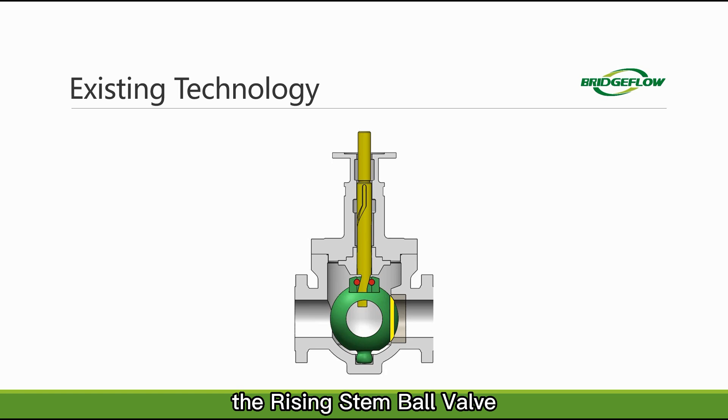Invented in the 1920s, the rising stem ball valve was the only mechanical seal ball valve in the market. One powerful benefit of this valve design is that it can switch on and off completely free of ball and seat friction, and therefore eliminate seal abrasion.

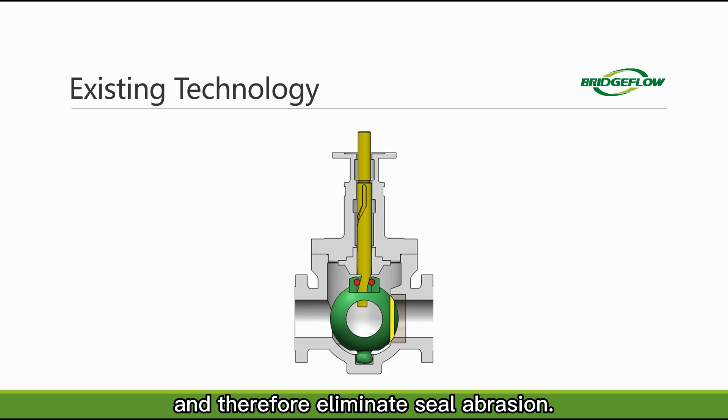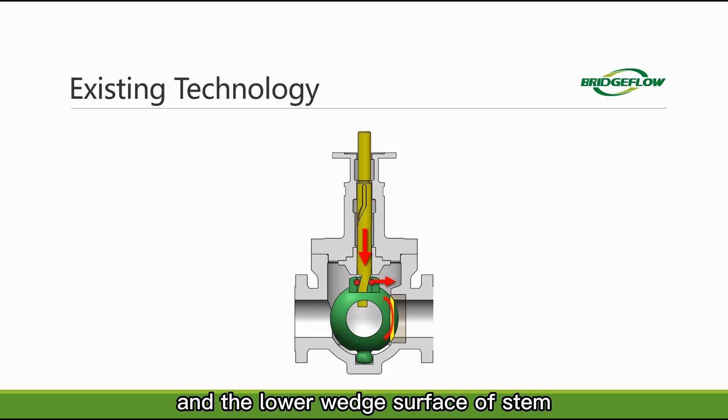The result is that this seal can last much longer than traditional ball valves. While closing, the stem moves down and the lower wedge surface of the stem squeezes the ball to tilt and compress the seat. A single mechanical seal can be achieved.

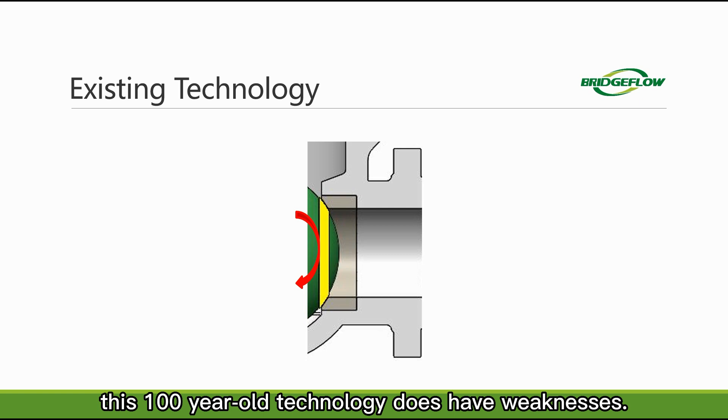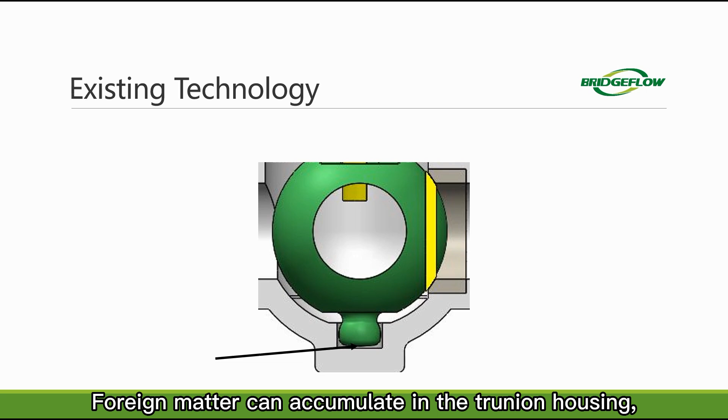However, this 100-year-old technology does have weaknesses. Firstly, it is obvious that the ball-to-seat alignment is very critical for the mechanical seal. Foreign matter can accumulate in the trunnion housing, which changes the ball-to-seat alignment. This misalignment can cause leaking.

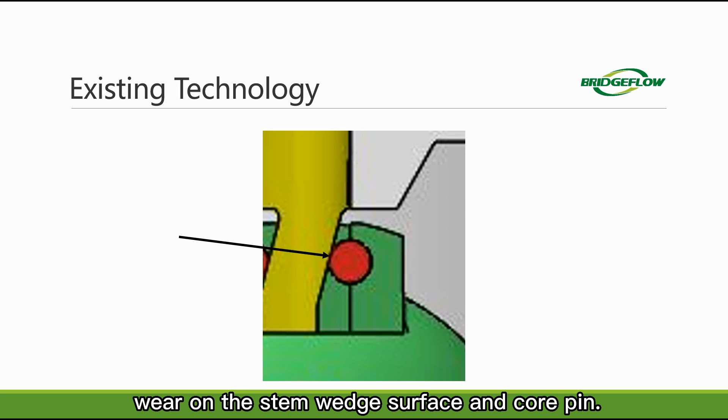Another challenge is material wear on the stem wedge surface and core pin. As the mechanical seal load must be transferred through this very limited contact area, it can easily cause the material to wear and the valve to fail.

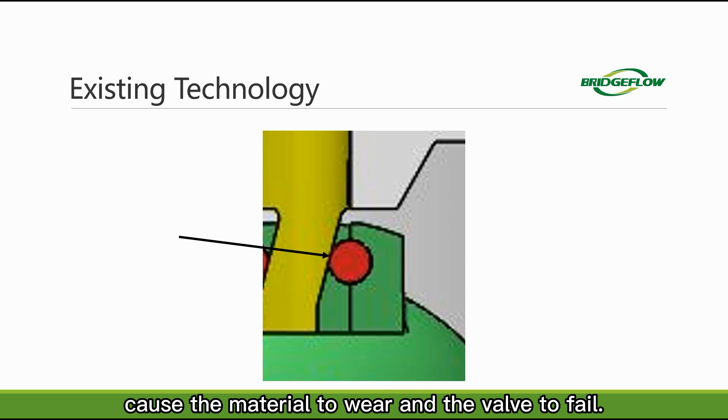And finally, it has only one seat, and therefore only one mechanical seal can be achieved.

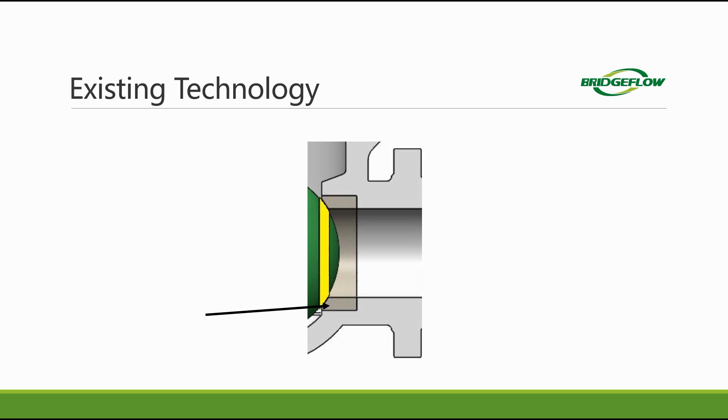In many applications, such as piping that needs isolation for maintenance, switching piping processes, or preventing product contamination, positive isolation is so critical that a DBB and/or DIB is required.

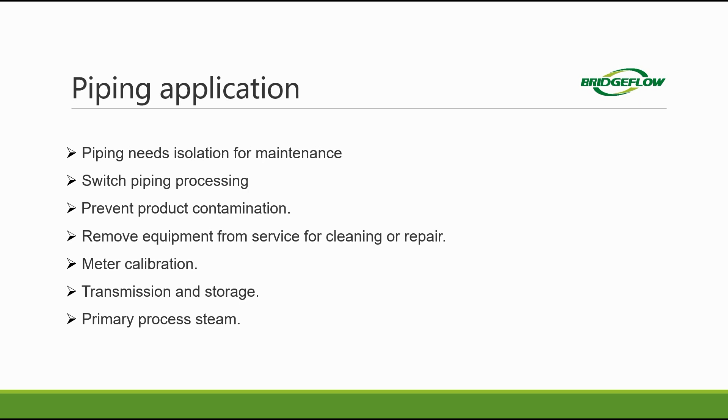According to API 6D, DBB and/or DIB as shown here requires 2 blocks and 1 bleed to stop the pressure from one side or both sides, and create an air gap by bleeding the space between the 2 blocks, so that a higher level of isolation can be accomplished.

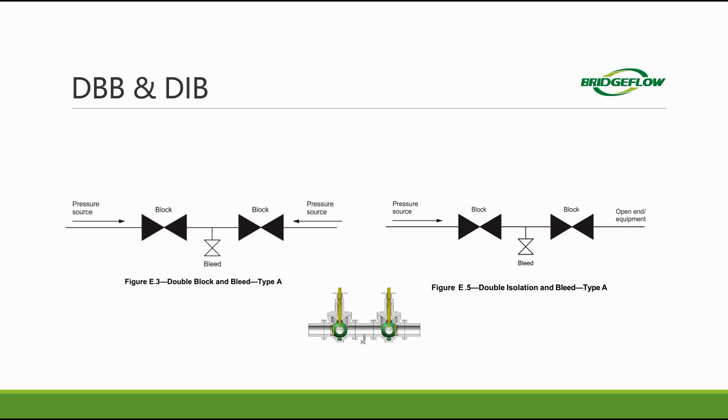This means that 2 rising stem ball valves will be required, as shown here, for the function of DBB and/or DIB. This system is very complicated, bulky, and full of potential leak paths.

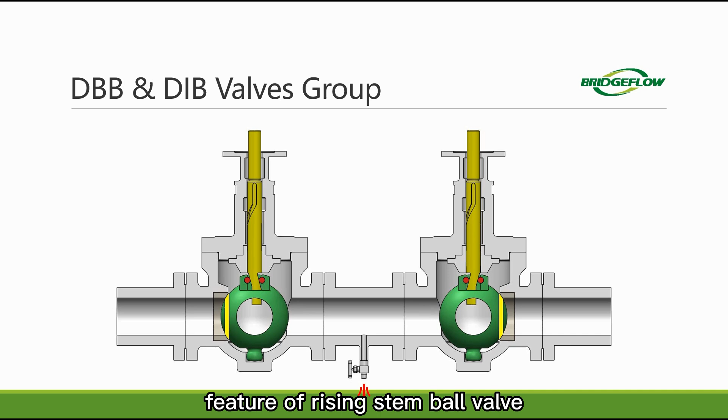Let's optimize this system in depth by maintaining the beautiful feature of the rising stem ball valve and overcoming all its design shortcomings. Obviously, the valve ends, seats, and blind segments on both sides are directly responsible for the mechanical seal.

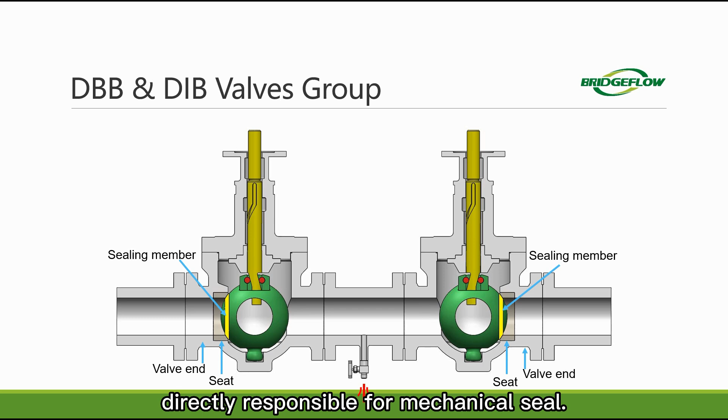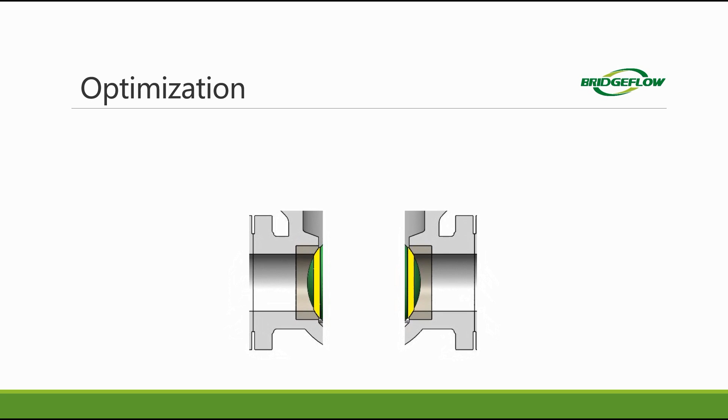Remove the rest, then compress the length of the 2 sections. Slightly modify the blind segments. What we need is a mechanism to provide the proper seal load for the 2 blind segments.

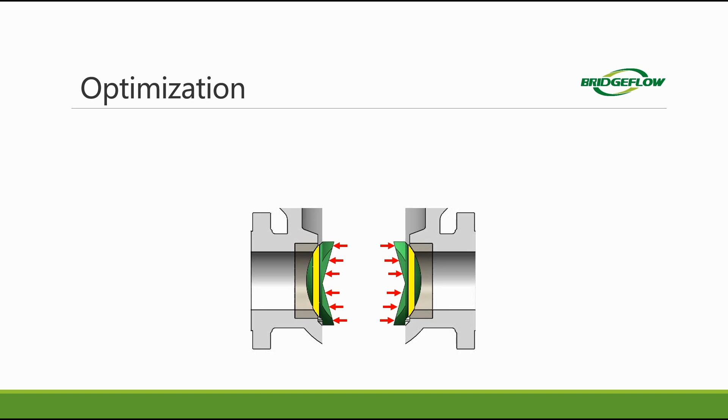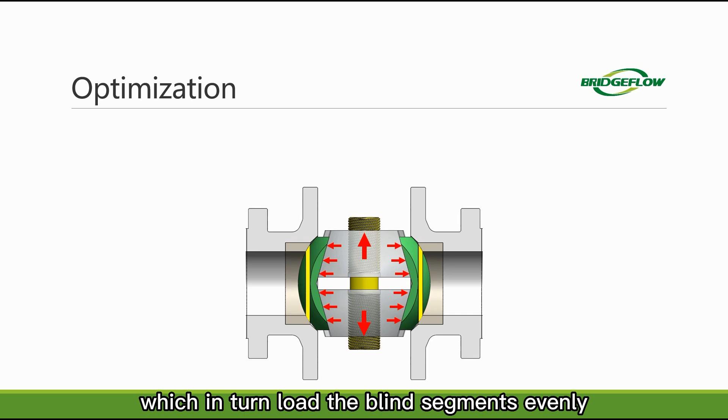This is the mechanism: a rotating threaded shaft mechanically loads equal amounts of force onto the 2 wedge segments, which in turn load the blind segments evenly and under equal and balanced force onto the stationary seat faces. 2 mechanical seals are accomplished.

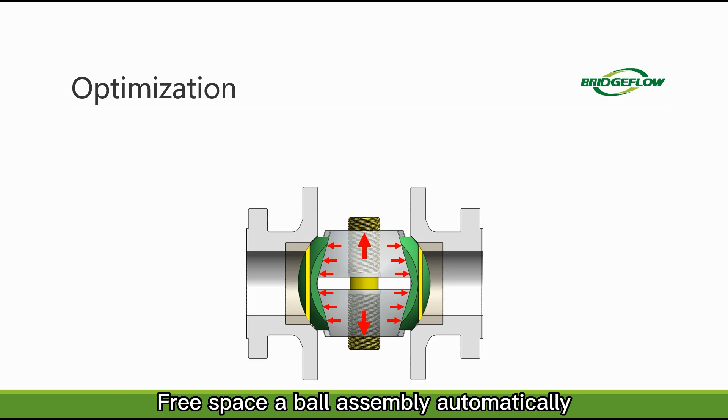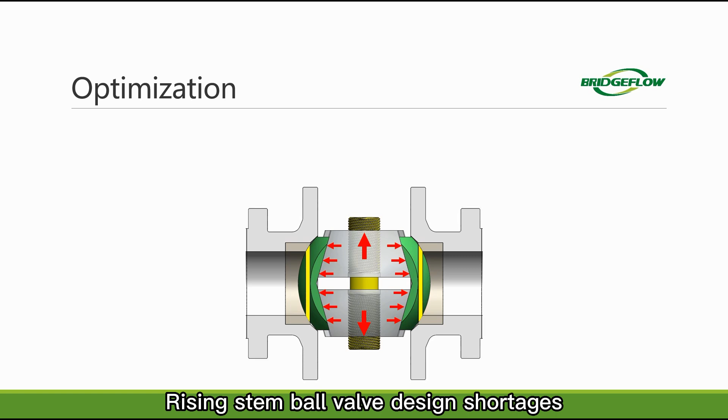Free space of the ball assembly automatically solves the ball-to-seat alignment. The mechanical seal load is beautifully distributed with no stress concentration at all. The rising stem ball valve design shortcomings are perfectly overcome in the new design.

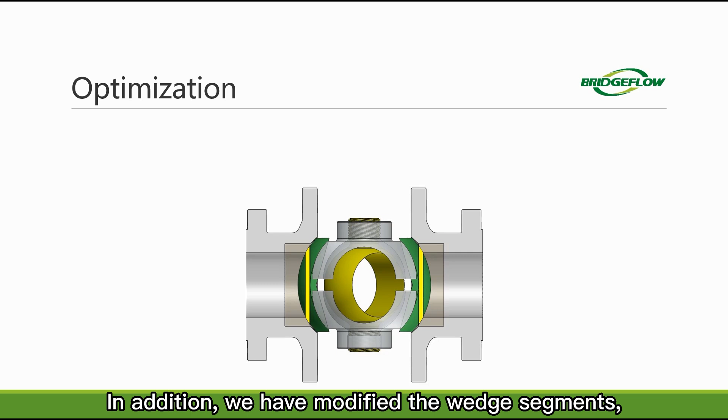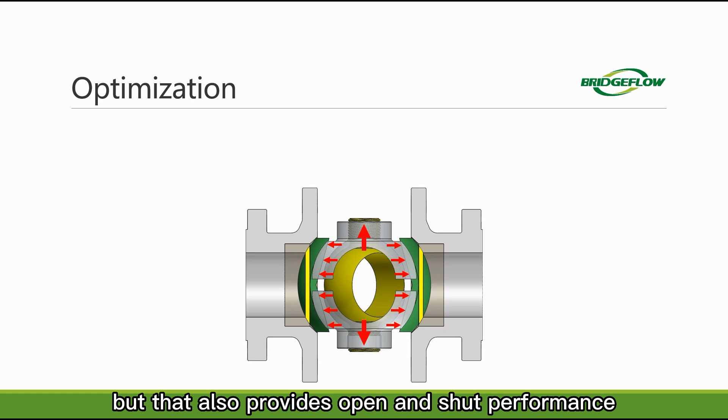In addition, we have modified the wedge segments and the shaft into a rotating ball assembly that maintains the function of providing a mechanical seal evenly to the spherical blind segments, but that also provides open and shut performance for material flow.

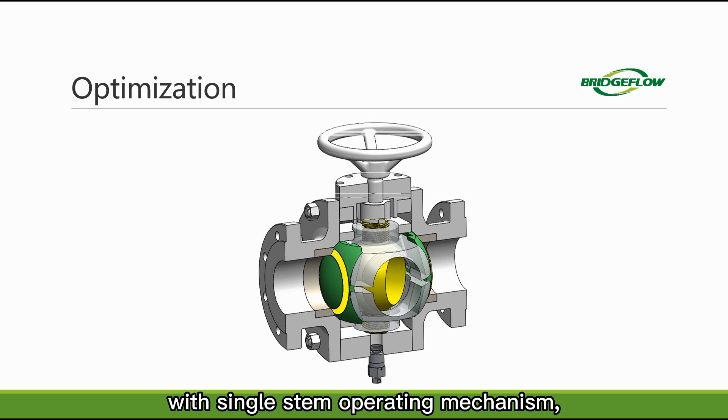Lastly, the subassembly is matched with a center body with a single stem operating mechanism and trunnion mounted. When opening, the ball assembly retracts the segments, then rotates until it is fully open, allowing for friction-free movement between ball and seats. It is full port in the open position.

When closing, the ball assembly first rotates to the closed position with ball and seats friction-free, then the stem drives the ball segments to expand. The blind segments press the seats under mechanical load to achieve a balanced mechanical seal.

Bleed the cavity, and positive isolation with DBB and DIB is functioned.

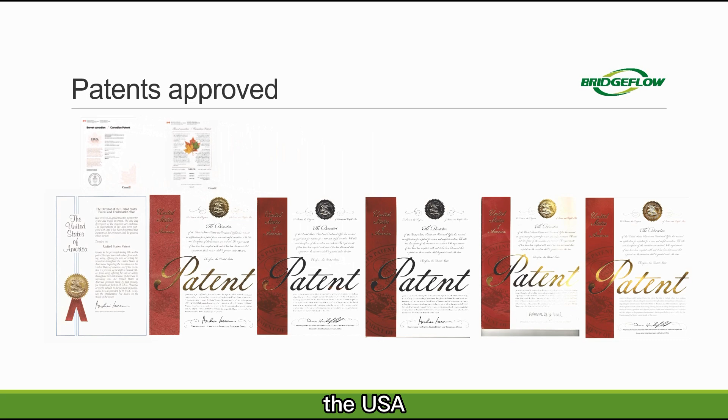The next generation mechanical seal ball valve technology is patented in Canada, the USA, China, and is patent pending in the EU and Japan.